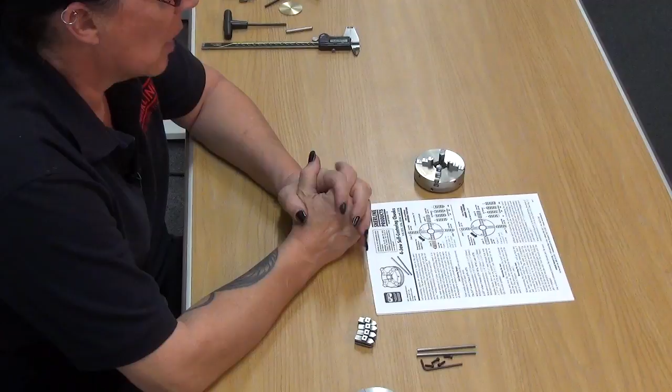into place. When you look at the jaws themselves, the bottom of the jaws, each one is different. The tooth pattern is completely different on each one, specifying that each one has to go in a specific order in the chuck to line up with the scroll, so they're all coming in and out together.

And then we'll go into mounting the pie jaws, which are just exactly what they are, pie jaws. They're very precisely machined to fit specifically these jaws. And then from there, we're going to machine the pie jaws and actually cut a blank clock wheel, a brass clock wheel. This is the blank I just knocked out of some brass. We're going to skim it down and true it up and drill a hole in it, and we'll go from there.

Okay, to remove the jaws, if you haven't done it before, all you need are your 2 Tommy bars. Put one in the outer ring, one in the inner ring, and just start rotating it until the jaws come all the way out. And there they are.

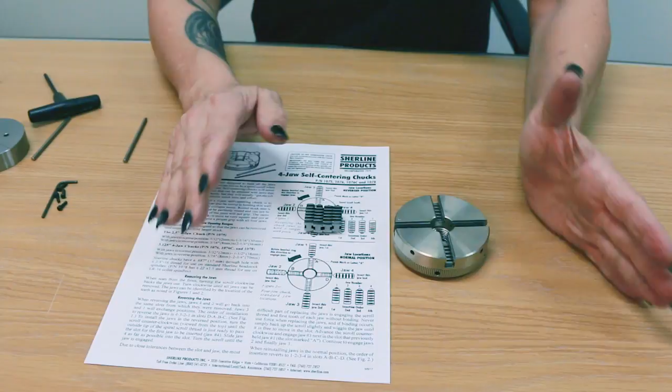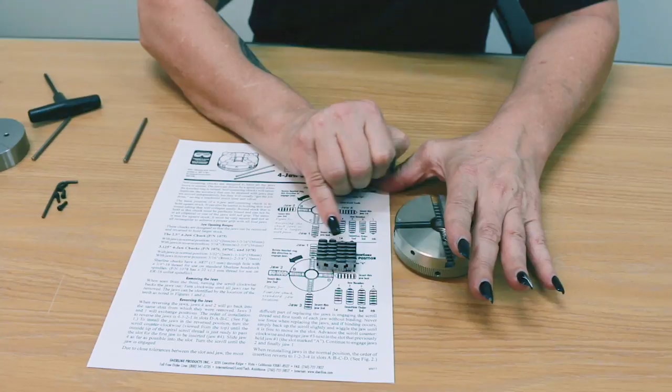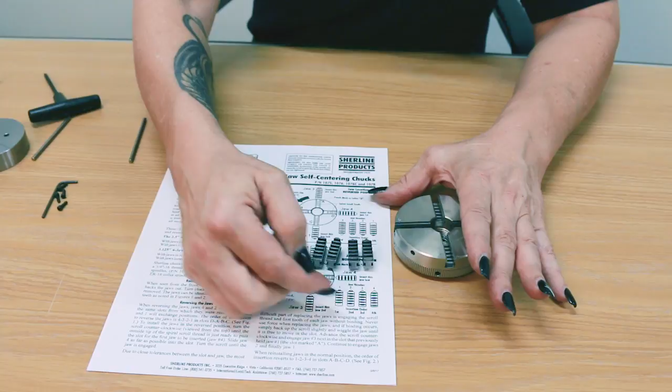Okay, this is where it gets a little kind of tricky, and you have to really pay attention to what's going on here. Because if you look, each jaw, the tooth pattern on each jaw is very specifically different, and they have to be laid out in a very specific manner in order for them to go into the scroll correctly. Now, in the instructions, it lists it and labels everything extremely clearly and very concisely, and I urge you to follow the instructions word for word verbatim, and you should not have any trouble doing this.

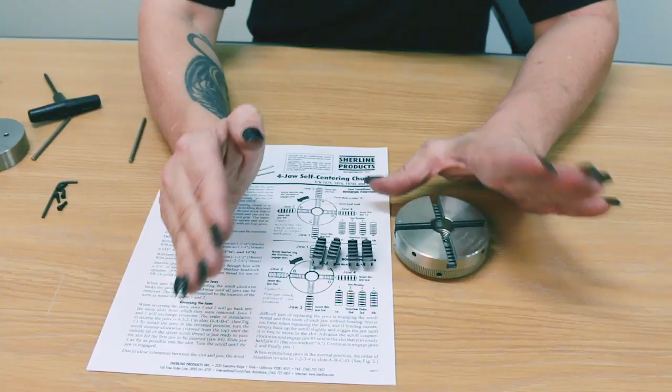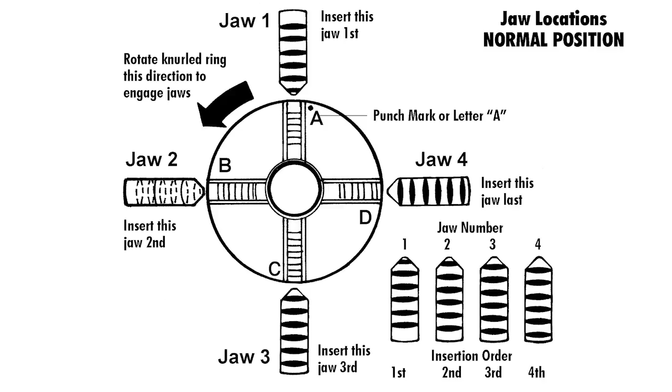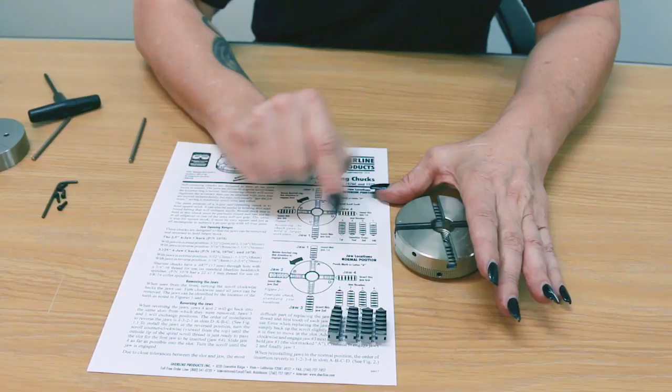It is kind of a learned process. You kind of got to fidget with it a little bit to get everything to drop in, because you're doing 4 jaws simultaneously, and 3 or 4 extra hands wouldn't be a bad idea sometimes. But if you can see in the diagram here, we have the number 1 jaw, the number 2 jaw, the number 3 jaw, and the number 4 jaw. And those are laid out specifically because you start the process of inserting the jaws 1, 2, 3, 4 in A, B, C, and D.

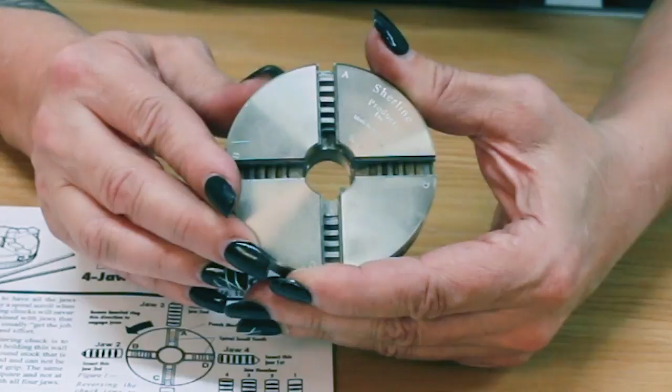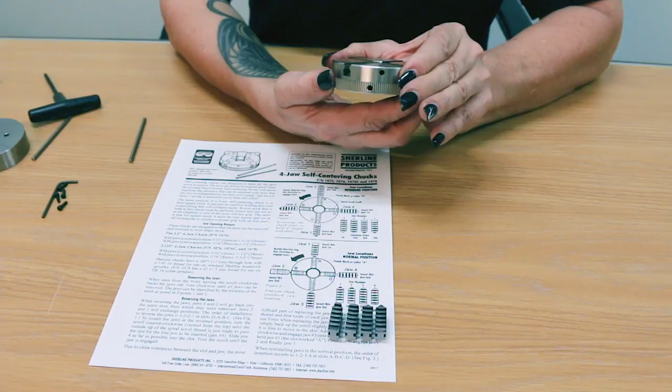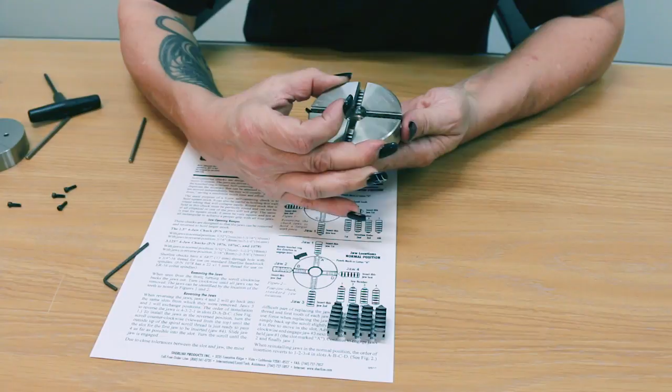And when you're doing this, you can kind of see the scroll rolls in and out. And where you want to start is with the scroll at its, let me see here, where is it? Okay, that is the starting point. You can see in this that this distance here is the largest it's going to be in the rotation. As I rotate it, you can see that distance gets smaller. You want it to be the largest it is, and you'll see the next scroll rotation start to come into view. What you do there then is you insert the first one.

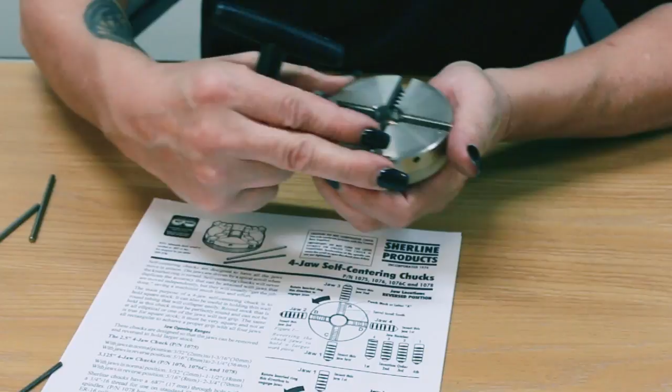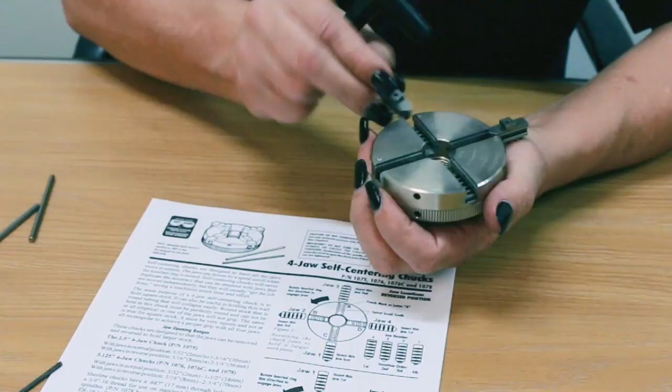Use your handy dandy T-handle. Come on. There we go. Then you go to 2. You go to 3 and C.

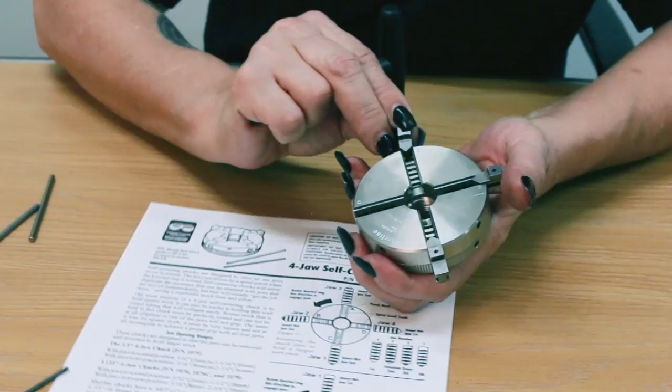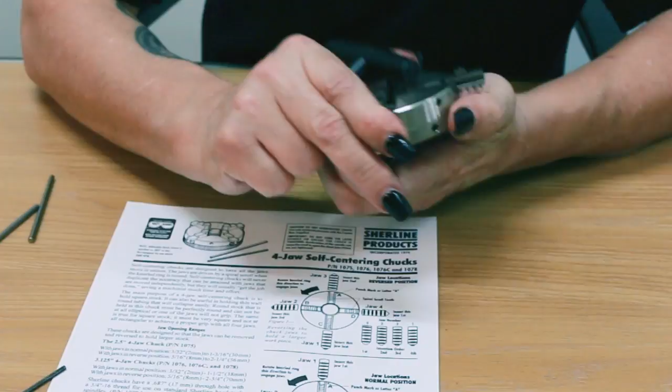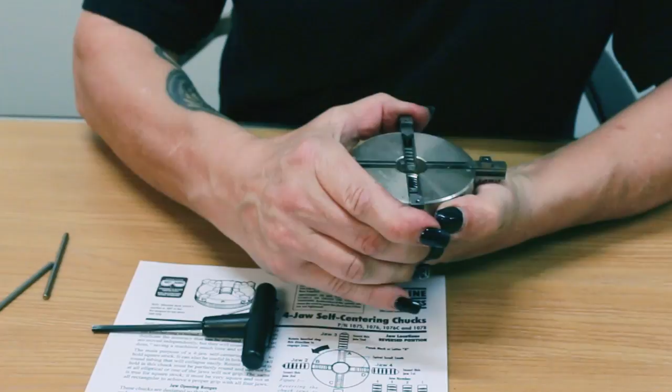And I got it off. You can see these are going in much farther than this one is. So that's kind of good. You can see what happens when that does that. There we go. And then D.

And as you turn the scroll, you kind of want to help the jaws in. And once they're about a third of the way in, then they will drop all the way in, and they're as they should be.

Okay, now that the jaws are mounted in the chuck, we're going to take a look at the actual pie jaws themselves. We have them in steel, and we also offer them in aluminum. And these are very precisely machined jaws that are designed to interlock with the master jaws themselves and then secured in place with a 5-40 screw. And essentially all you need is your 3/32 Allen wrench.

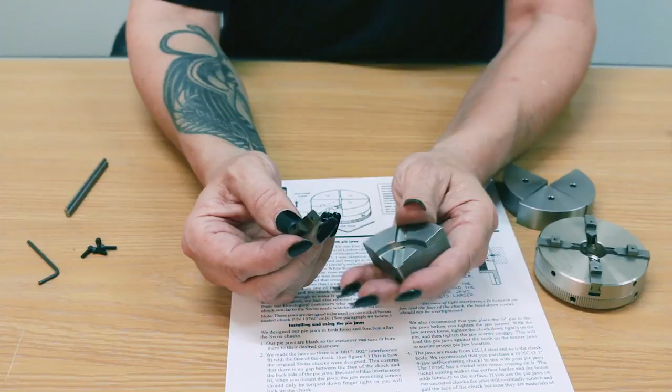I'm going to describe exactly how this fits in and why it works the way it does, and we'll get a little closer in for that so you can actually see the jaw integrating into the master jaw. Okay, I'm going to show you how the jaws actually interlock with each other. This is the master jaw. I brought an extra one for demonstration purposes.

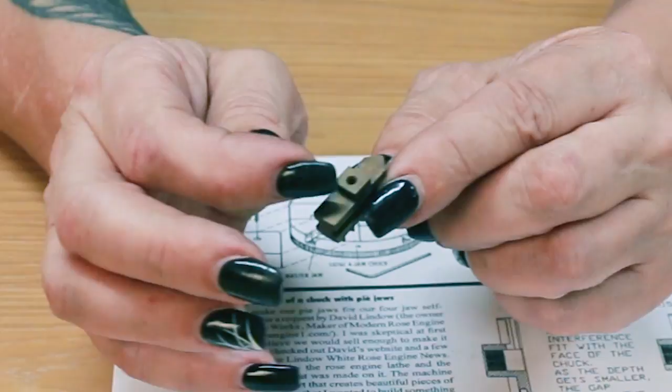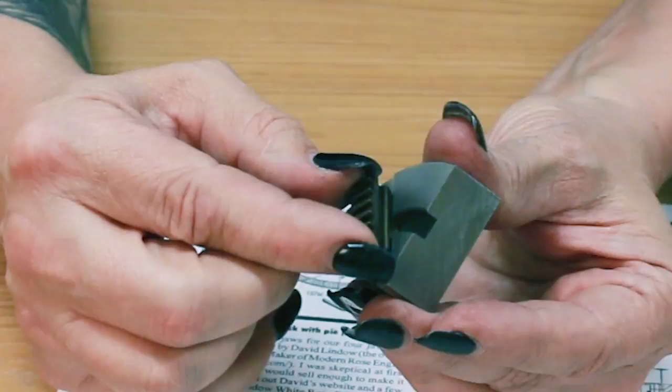You can see that the spur is radius cut, meaning it was cut on a radius when the jaw was actually fabricated. So that will fit into the circle cut on the actual jaw. And then we have a radial straight cut. And the jaw itself interlocks very snugly into each other.

Very tight, very snug. And then you simply drop your little screw in. And that's it. It isn't going anywhere. Very tight, very snug, very positive.

And now we're just going to simply mount the jaws. Each jaw does have a corresponding laser engraved letter to correspond with the correct spot on the chuck. This is A. Obviously it will go into A. You just lock it into the ridges and put your little screw in there. And just snug these down just so they make contact for now.

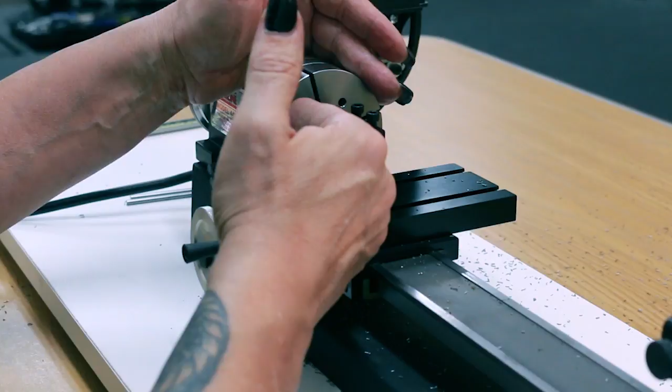During the commercial break, I actually pulled the tool back and measured everything, and I nailed it perfectly. I'm exactly 25 thousandths depth, and the bore so far is 1.444 inches. I need to go out to 1.755. I have everything set to do that. I'm just going to start at the existing cut radius and bring it out, and then just do a final very thin skim pass at the very end to blend the base of it.

Okay, I'm within 10. I'm going to pull it away and do another measure. I'm not going to move my tool post.

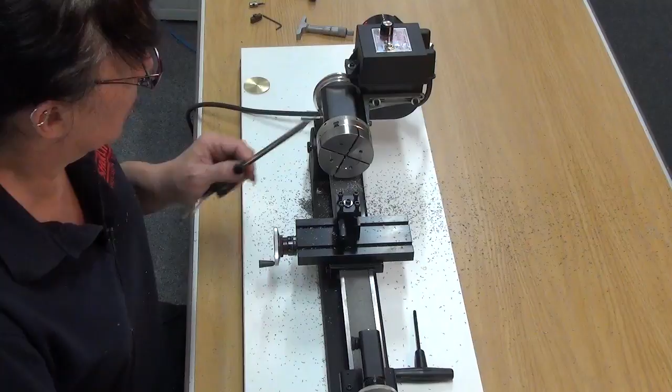And that is the bore. And then the final step is actually mounting your piece in the chuck. I did change over from the boring bar to the turning tool. Do not forget to remove the dowel pin, which frees up the chuck. Open it up a little bit. Mount your gear blank.

Now the jaws, the chuck is only holding on to 25 thousandths of that gear blank. But the fact that it is covering almost the entire circumference of the blank, it is holding on extraordinarily well. And that will afford us to be able to machine quite aggressively and thin this clock wheel blank up.

Incidentally, that's kind of where the pie jaws were designed for. It was in the clock and watchmaking industry, but that's not to say that's their only use. They're very good in doing very delicate, thin parts that are very difficult to hold any other way. It gives it a nice backing surface, meaning you can put pressure on it and it isn't going to bow away from the cutter. And being it's almost full circumference of the part, it holds very well. And that being said, we can start turning.